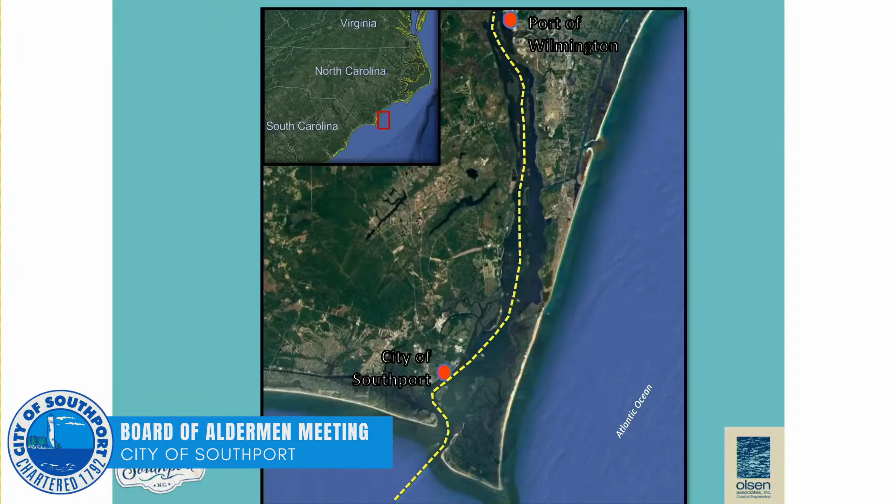So everybody knows where the city of Southport is. But there's some important things that could dictate how your shoreline behaves. This graphic is intended to show generally where Southport is, but an important feature seaward of your city is the federal navigation project and channel for the Port of Wilmington, indicated by the yellow dashed line.

This is a graphic that depicts, and if anyone can't see this, please move around the room and get closer. This is a depiction of the identified study area and project area as it was identified to us in 2018. It goes from the Marina Basin up to Bonnets Creek, about 4,000 feet in length.

I'll talk about these particular reaches a little later in the presentation. But things to be mindful of for planning shoreline restoration and improvements along the shoreline is the current state of the shoreline. It's highly eroded, going years without any meaningful attention other than revetting the shoreline.

When you harden the shoreline, there are unanticipated or undesired consequences in some of the adjacent areas, but it is the last line of defense. The revetment along the road right out here is a perfect example of the type of armoring that is fairly prevalent along most of the areas, some in the form of bulkheads. When you do that, you lose all the sand beach, the wave reflection, and just a general lowering of the beach profile and the loss of the sand.

So you turn the shoreline from what might have been a sandy, marshy shoreline at one point to a hard shoreline, and the tide doesn't even go out—you don't have any shoreline even at low tide. So it's high erosional stress, and the things that affect this shoreline are storm surge, which you guys are very familiar with, and wind waves, which are blown across the fetches we can see out the window. Larger fetches result in bigger waves.

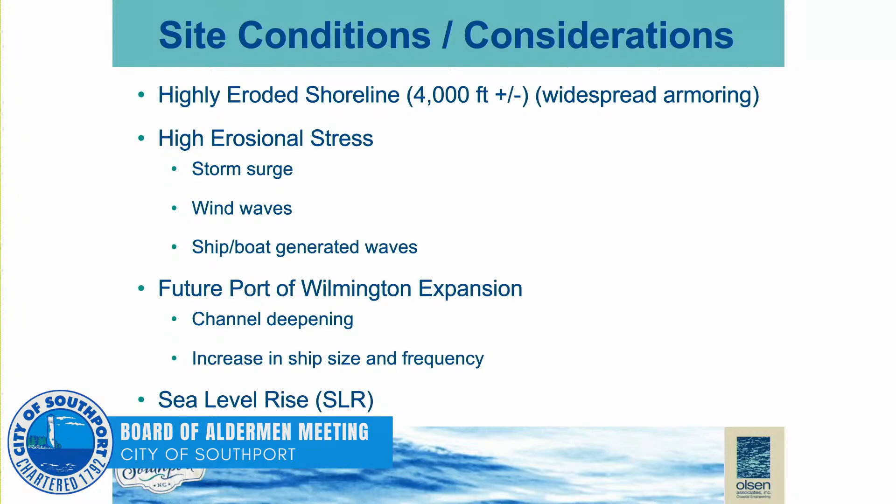So even if it stays at the historical rate, we're still going to see another foot of sea level rise here over the next 100 years. So we already have areas that are flooding, sometimes sunny day flooding here in the city.

To give an example of some of the conditions and how they might predict, or what they're predicting for Southport above a background erosion rate, various predictions. Some of these numbers are quite large, above where we think it might be in the next 30 to 50 years.

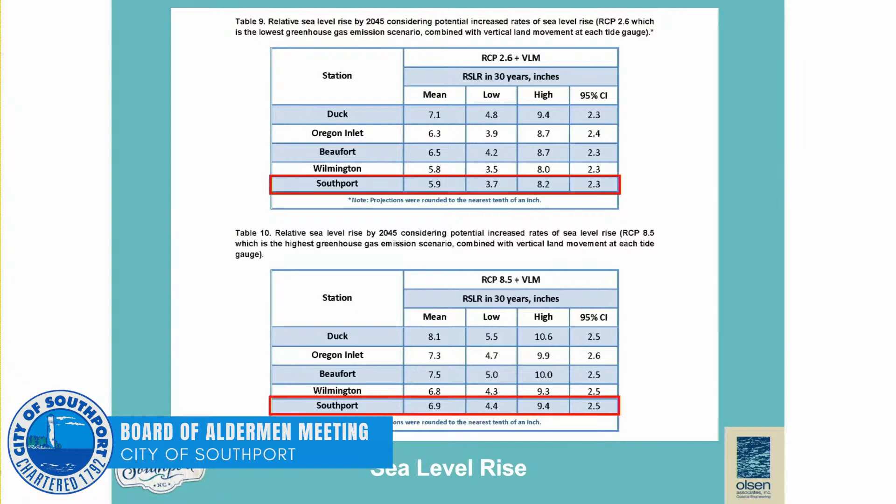To dissect the city of Southport's main shoreline, we took an approach of looking and divided it into subsections, into 6 sections from left to right. I'm going to point this out directly.

Section 1 is the area of the sand beach between the restaurants, the marina, and the rock revetment we call the U.S. Army Corps of Engineers revetment. The Army Corps built this large rock wall around the lift station several years ago as the last line of defense to protect that piece of critical infrastructure.

Then we move into Section 3, which is the area along the hotel and the restaurant with the wooden bulkhead. That's a different type of shore protection, with its own characteristics and its influence on the adjacent areas.

Then we transition into another area around the pier and the large revetment right out here. Section 4 is right outside the window here in our definitions. Then we transition into Sections 5 and 6, where the private development and private parcels are, with piers and bulkheads along most of this.

In Section 6, there's a distinction because there have been past efforts to put shore stabilizing structures there to retain a Spartina marsh in front of those bulkheads. Some of the concepts we've used are founded on the example we see here in Section 6.

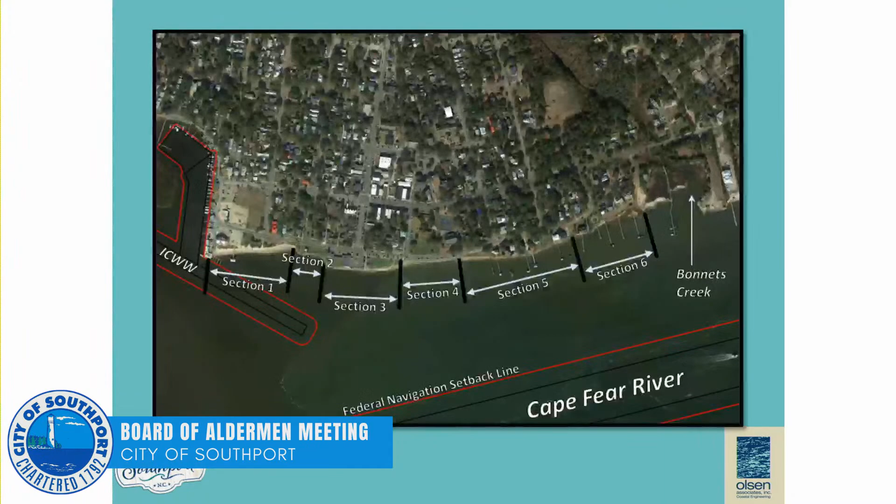So this is just drilling down a little bit. Sections 1, 2, and 3 give you a little better view. I'm probably telling people things they already know, but it's important because of what we plan for—we need to really understand what type of conditions exist along each of these areas and what the goals are.

One important thing is the sand beach, and whether public access would be a goal—for somebody to walk onto a sand beach and traverse the shore from north to south. Right now that opportunity only exists along a very short reach of the city shoreline. Would it be a goal of the city for this to extend all the way down, connecting some of the parks and public areas from north to south or east to west?

Just another example of these types of materials, but it's very important. One thing I like to show with this photograph is the size of rock used with the Corps revetment, the U.S. Army Corps of Engineers revetment—very large compared to what we see on this revetment out here.

I'd argue the reason the Corps selected this size is a design stone size to compensate for the type of wave forces expected in this area. Through the recent storms, you've seen very little change to this revetment, unlike the one along the road right here that experiences change quite frequently—because the stones out here are probably too small in size.

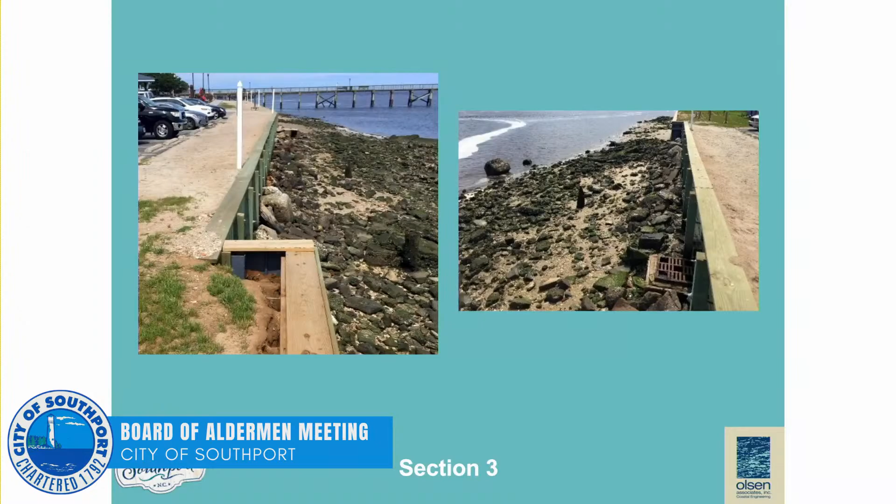But also, a cultural resource survey is currently underway, which will be needed to support regulatory decisions for whatever plan is implemented moving forward. I've been told that some of these stones that exist aren't just debris cast out there in the past as some form of whimsical shore protection measure, but also ship ballast stone and things like that from when this was in operation as a port.

Then we move into the area of sections 4 and 5. We can see here where the revetment is. Obviously, the road is a strip of critical infrastructure. At low tide, there is some limited access now, but it's pretty limited in time each day, and it's not super safe to walk along there—lots of debris and other things in that area. Then we transition into the private homes over to the right.

The existing infrastructure that is there now, and evidence of lots of other debris. A lot of the debris that exists along the shoreline are past failed attempts to stabilize the shoreline—the remains of that material.

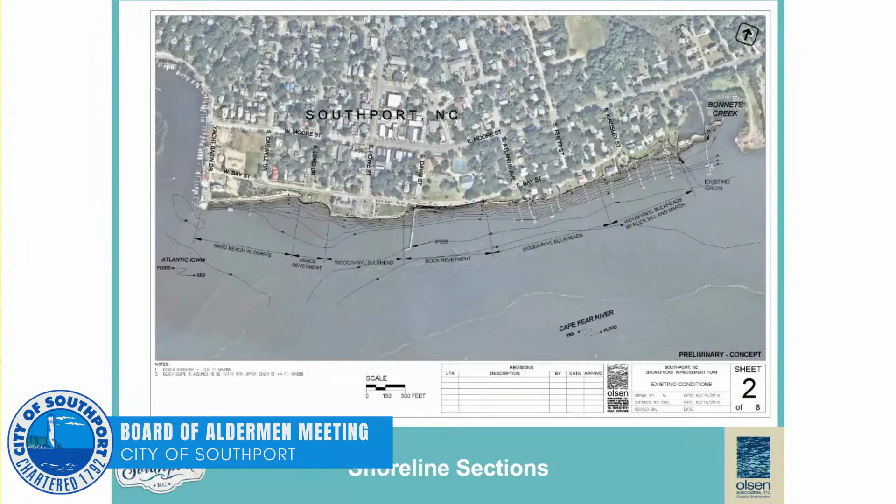The other thing we have to keep in mind is what influences the shoreline. What is the wave field like that is generated along this reach of shoreline? Wilmington Harbor's ship channel is less than 1,000 feet away, and even if you look at some of the larger boats that go by here on a daily basis, you can see that they produce waves that do influence the shoreline.

Ship waves are likely the most impactful ship-generated, boat-generated wave that reaches the shoreline. But obviously with the presence of the Wilmington Harbor Channel as well as the Intracoastal Waterway, there's a lot of boats going around this area, and so there's a lot of boat-generated waves.

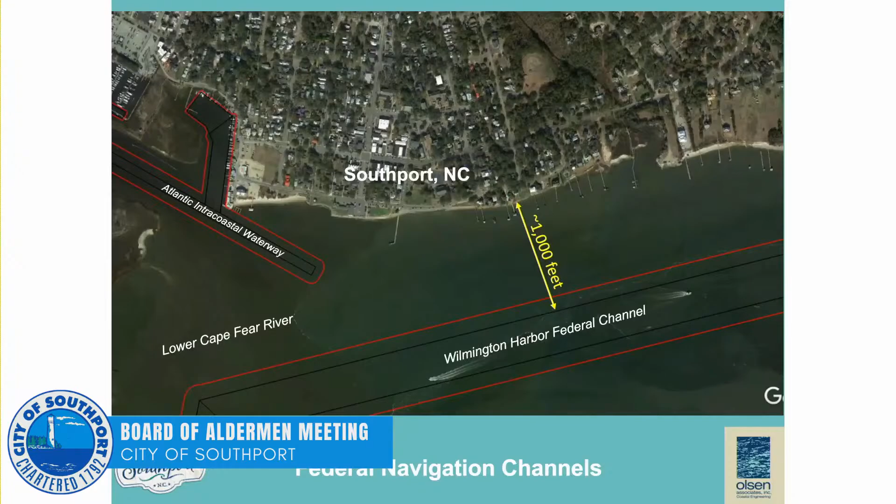So the project goals, and some of this is from last time. All this is subject to additional conversation, so we can talk about it more.

Obviously, comprehensive shore protection and stabilization is key. How do we protect ourselves from these coastal storm events and environmental factors that exist out there? But how do we do that and also provide other opportunities we might want to have? We want to protect the shoreline and upland from erosion. We don't want any more loss of land.

Ship-generated waves is a big key design feature, not only presently, but also in the future. There's already been work done by the state and the state ports to help identify some of those future forces along the shorelines of the lower Cape Fear River. And how tolerant will you be to future sea level rise, and what will be your goals, trying to compensate for those expectations? Do you live with it, or do you try to respond to it?

The environmental resources of the area, principally the marsh areas, are considered environmental resources, but they also provide shore protection benefits. Recreational value has always been a key component to the goals of the city, to our understanding. How do we integrate that into a shore protection approach? I really like the idea of expanding these living shoreline features that already exist along portions of your shorefront.

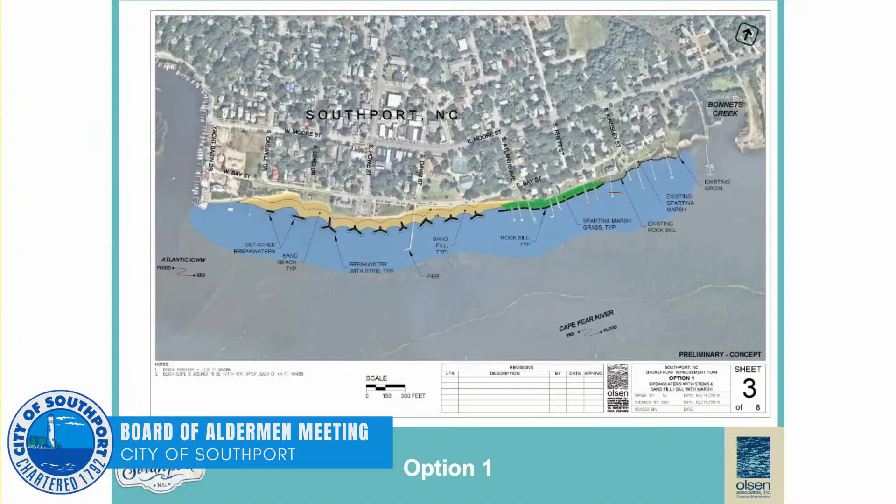And so that's where we stand now. We have these past options. We're 4 years from where we started, or where we left off last time. So there have been lots of changes—you've had several hurricanes that have been super impactful since we were here last. So we're currently updating things, and we can talk about what we're doing in a minute, but let me finish the description.

These are the types—if you drill down in here—these are what the structures and sand fill look like in cross-section. This being a revetment where there's no beach or anything. This being one of the T-groins where we've got a breakwater head and a stem with some sand fill. This is a breakwater offshore with the sand fill behind it. This is simply sand fill with nothing. This is between structures. And this is what it would look like for this part, kind of marsh, with a much smaller rock structure, a little bit of fill behind it, and grass planted on top of that. So that describes, in sections, what those structures look like.

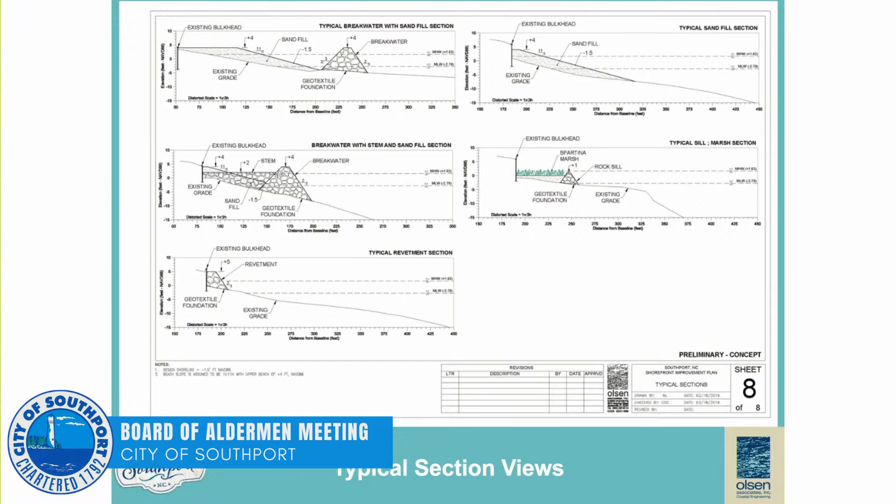So where we are—current activities—and then we'll talk about where we want to go with this. We're updating the topographic and hydrographic survey right now. That is, we're trying to get an update of what the water depths look like offshore. Has there been additional scour? Has there been additional sand loss? Which will ultimately increase the quantity of material required to build whatever option is picked.

We have the Cultural Resource Survey and Investigation. Dr. Gordon Watts from Little Washington is the principal investigator for that study. Then, once we go through this plan selection, we'll be getting into the next step. The next steps are really working toward a preferred approach and confirmation. I say preferred approach confirmation because we already have 6 options—are those options still something that the city would like to consider?

We will go through the process of updating quantities, updating projected costs with those, and help guide some decision making to ultimately reach the goal. We'll do schematic level design, then jump into the permitting. The way you get through this whole process is you do your schematic level design and jump into the regulatory portion, and you're successful.

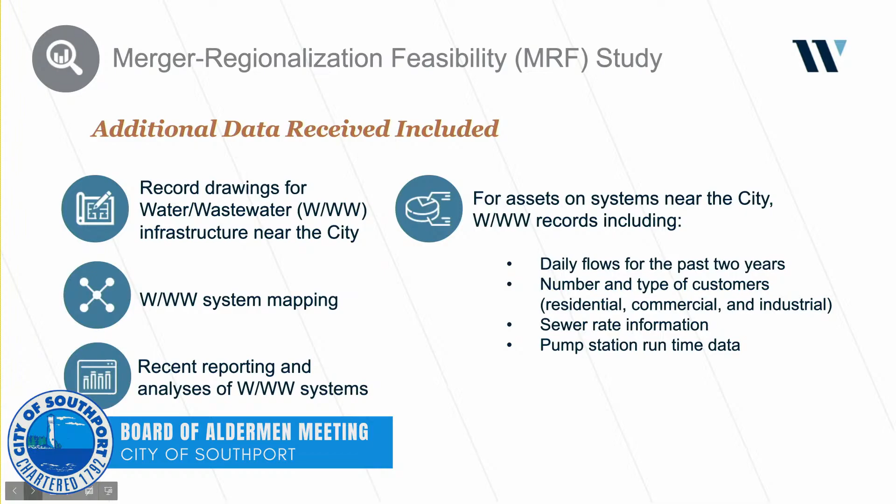Some of the information we received: record drawings for the water and wastewater infrastructure near the city, system mapping for water and sewer, recent reporting and analyses of the two systems, and regarding systems near the city, daily flows for the past 2 years, the number and types of customers, sewer rate information, and pump station runtime data. So that's the information we're working with right now and going through.

The study goals, there are 4 of them. First task is to assess the age, condition, and vulnerability of existing asset inventory. Task 2 is to develop estimated costs associated with assuming responsibility for Southport's water and sewer utilities. Third task is to conduct limited financial analyses. And the fourth task is to prepare a technical report.

With all the information we've received, we've begun compiling the overall maps, and we are fully aware of what the city is doing to improve the wastewater system design. We also need to confirm with the county what needs to be done on their end to take over the Southport utilities.

Importantly, as these studies are very involved, we typically budget 1 year to perform them, start to finish. This is based on the number of people involved with gathering of data and its review.

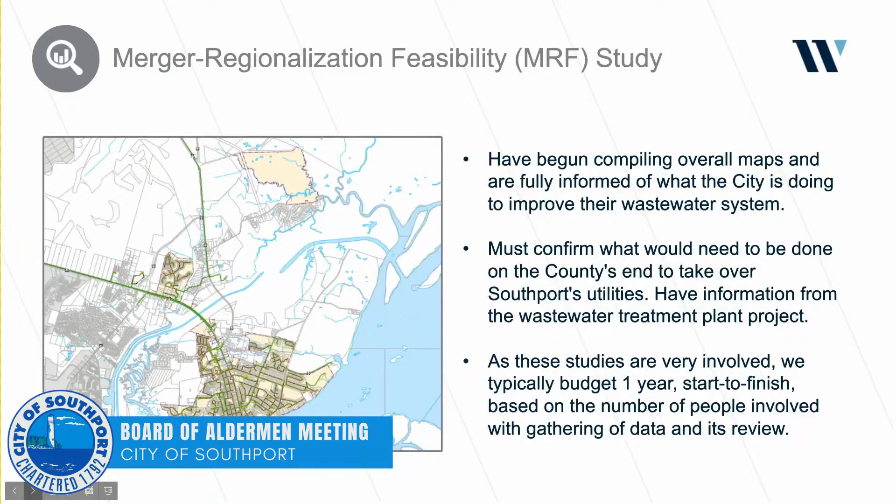Now on to the USDA project. The project involves a replacement of approximately 18,100 linear feet of gravity sewer lines. I'm sure you're fully aware of this already. It includes construction or rehabilitation of 111 sewer manholes, and the installation of a new pump station to replace the existing Leonard Street pump station.

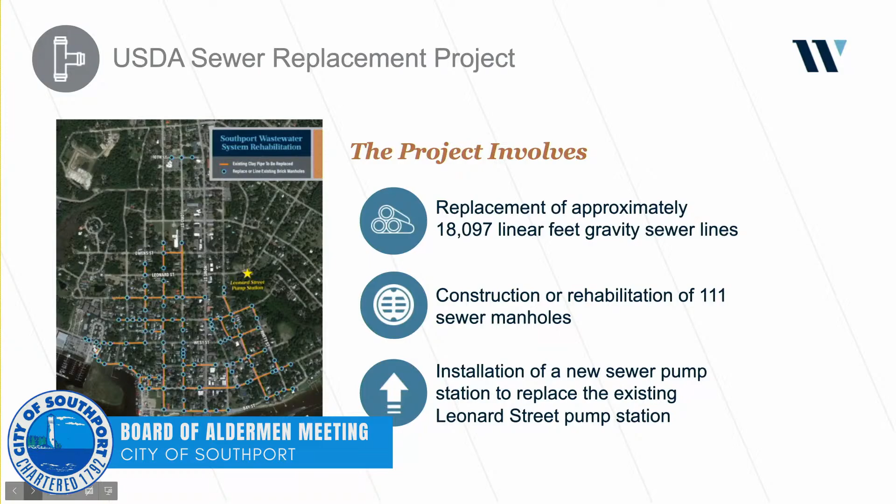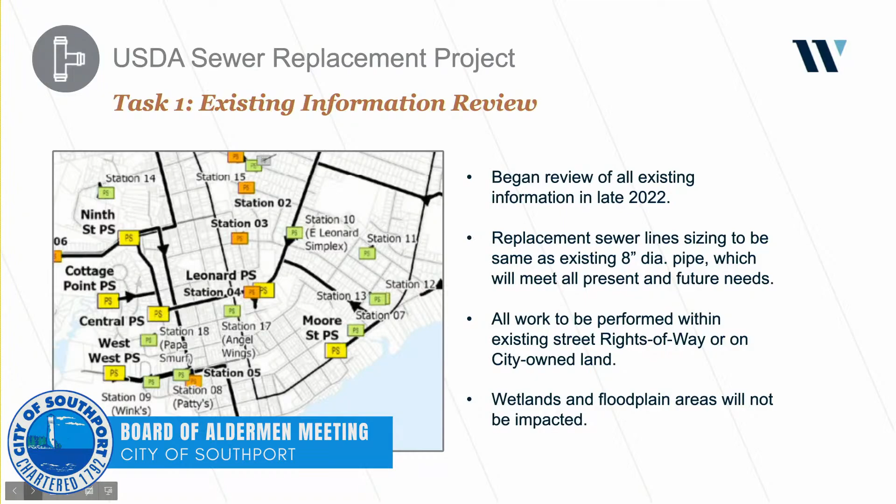The information review began in late 2022, before we even had an engineering services agreement. We just wanted to get a jump on this. From that information, we determined that the 8-inch sewer line currently in place is the correct size, so we'll be replacing it in kind with modern material. The sizing is fine for current and future needs. All the work will be performed within existing street rights-of-way and on city-owned land, and wetlands and floodplain areas will not be impacted.

Regarding the Leonard Street pump station, it currently is adequate as far as pump sizing. It's just that the pumps are old and need to be renewed, rebuilt. So the new station needs to go in. There's no new flow increase anticipated. Current operating range is approximately 49,000 gallons per day on average, with peaks estimated to 76,000 gallons per day. So again, the new pump station will be sized similarly.

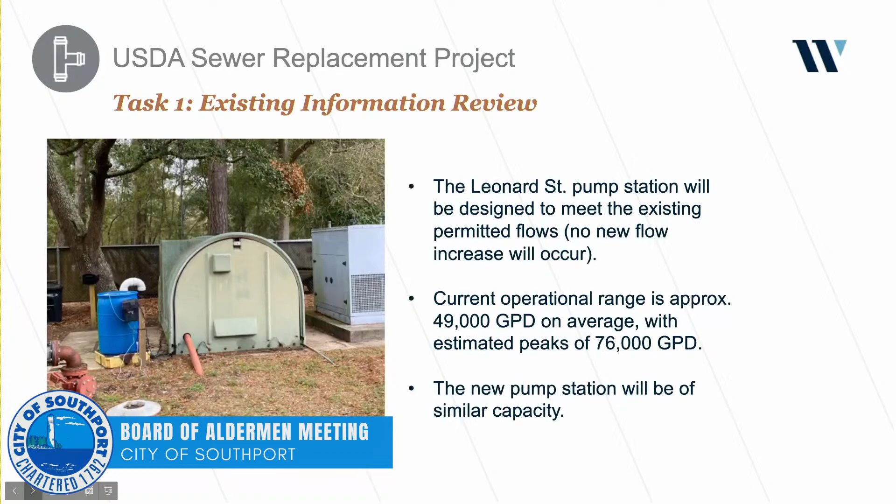Surveying here is the most important task we're currently involved with. The faster we get that information, the faster we can begin our work. I'm sure you've noticed spray paint along all the manholes along Southport. Hopefully you weren't too surprised when that started happening. We've engaged our in-house geomatics team immediately, got them ready as soon as we got the agreement, and sent our crew out back in January. This is the single most critical part of the project schedule to date. The faster we get this information, the faster we can produce our product.

Now this is looking ahead. These previous two tasks we're currently involved with and working through. The third preliminary design task happens after we receive our survey information. This is just an example here, not pertaining to Southport, but the preliminary layout will be created, identifying all existing conditions together with a plan schematic of the proposed pump station and gravity sewer alignments. The submittal will also include an updated opinion of probable construction costs, to keep the city apprised of any cost implications or fluctuations.

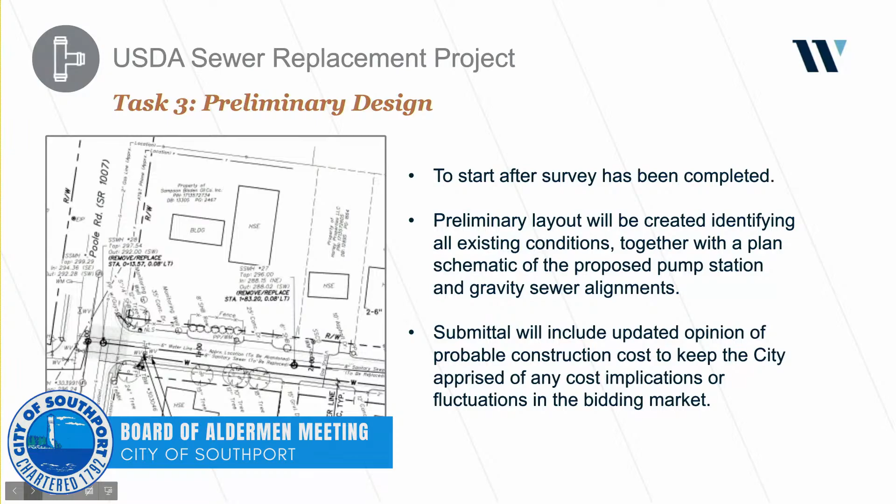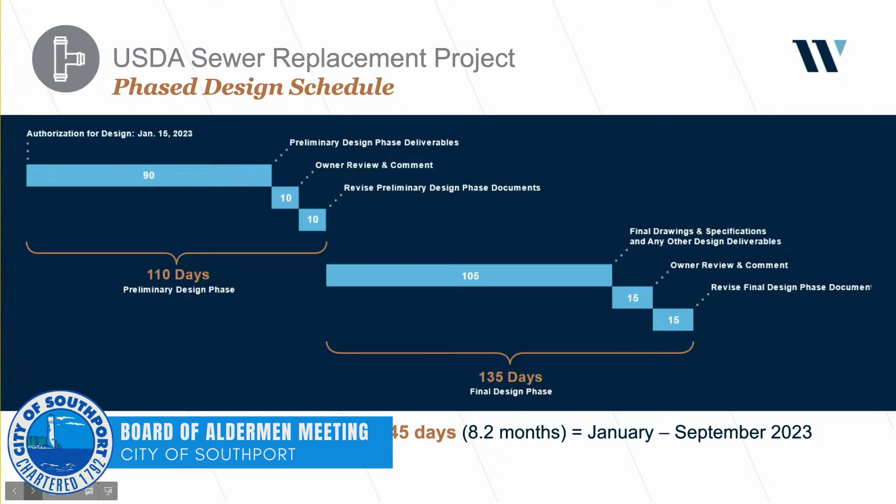This schedule was part of the USDA Engineering Services Agreement. We have 110 days starting from mid-January to complete our preliminary design phase, including a 10-day review for the city and 10 days for us to incorporate those review comments. Then we have 135 days for the final design phase - that's 105 days, plus 15 days for city review and 15 days for us to incorporate those reviews and produce the final product. So all total, 245 days, 8.2 months - mid-January to approximately the end of September. Hoping for that to be faster.

I wanted to point this out here - as far as the overall project schedule, the first part's there, up to what I just spoke about. There's 140 days allotted after the permit applications go in. Based on the 140 days allotted to the schedule, we would be ending the end of 2025, November 2025. So the shorter that permit process is, the more time we'll have available, or the more quickly we can end the project and get it done with construction complete. I'm just saying that based on the schedule currently laid out, it allows for 140 days for permit review and approval. If that's shorter, the project timeline could shrink a bit.

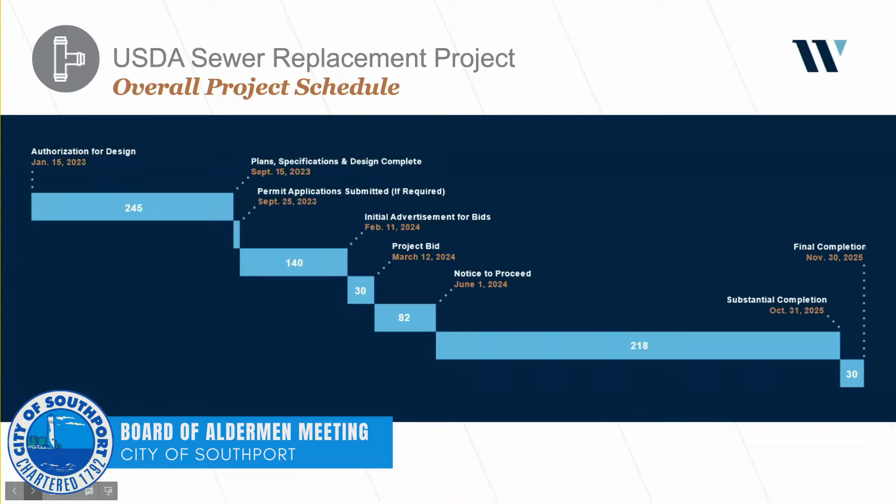So according to that, when does the first shovel go in the ground? That first shovel is June 1st, 2024. Again, hopefully we can move that up a bit. It's also to work around the summer season here as well - obviously with tourist season and all, we'll try to coordinate that to make sure there's not too much impact.

So with that said, that is the end of it. Again, an overview this time. Next time we'll have more real information to give you, as we will have gone through a little bit more of the process at that time.

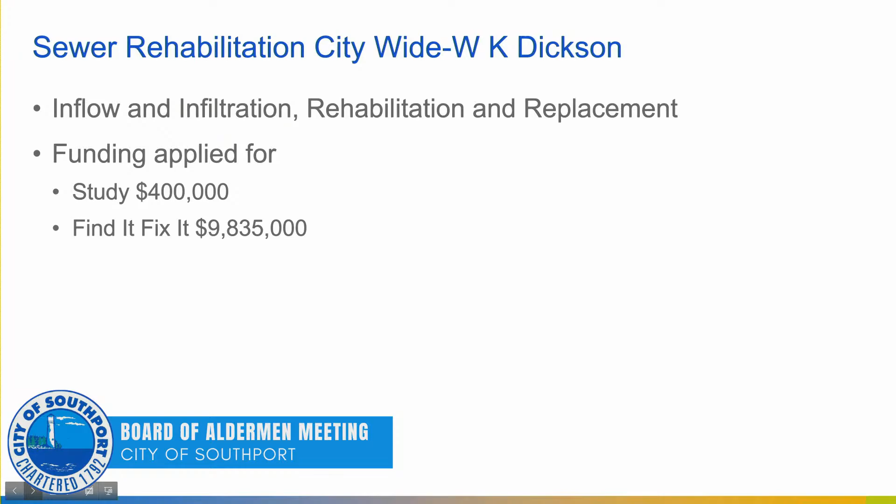We also have smoke testing to be performed. Just because it's PVC pipe doesn't mean it's completely tight. The city has also encountered some manholes that have had leaks in them in the past and has had this fixed. But with this study, we'll be able to take a broader look, try to identify the areas where water is getting into the system and causing impacts during severe weather events. That'll help with managing the current system, having future capacity, and future cost.

So that study—the phase of it has been recommended by the staff at DWI for approval. The next step would be a letter of intent to fund, and then there's a process of back and forth fine-tuning the budget and schedule before starting those activities. But that can be done concurrently with these other projects, and since it's a grant, it'll help you identify and get the best value for prioritizing projects and the best value for construction cost.

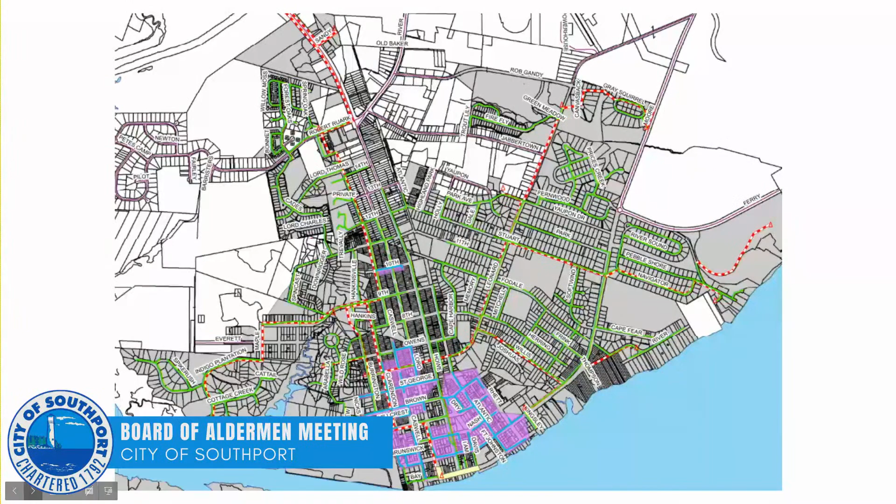The other project is the lift station rehabilitation, with a funding amount of $2.8 million. We've started that project—done field assessment and drawdown testing of the pump stations; I'll go through the results in a minute. The next thing we've started is evaluating different scenarios. We want to utilize the infrastructure you have in place, look toward the future with good improvement ideas, and use this money where you're going to get the most use out of it. I'll get into that in a second. Our schedule is to complete the design this year and start construction next year.

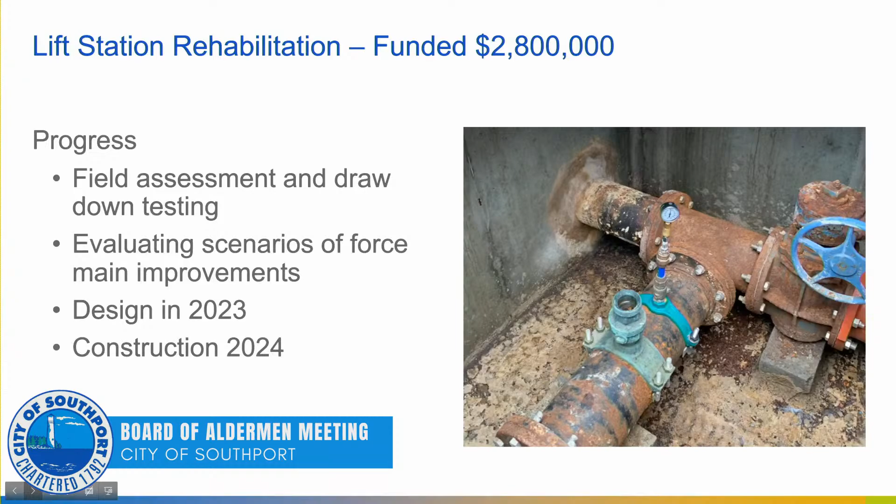The field testing—staff helped us out considerably and is still involved—was done at Park, Leonard, Moore, 9th, Central, and Forest Oaks lift stations. The results were that the pumps performed about as expected. Many of the suction lift pump stations have been replaced, the mechanical equipment has been replaced, and there's been some fine-tuning and adjustments we've been doing and recommending with staff and manufacturers' representatives to get the most out of your system. Those are just common things you need to do.

Moore Street was one that we were surprised had less capacity than we were expecting, but we're also looking at 9th, and really Central is the most important one because it collects all the wastewater from town and sends it out.

As we've been involved in this process, there's been some infill development requests on 9th Street. There's a development on Price's Creek that is looking for flow, and then there's a development on East Moore and Ferry Road that's looking for capacity.

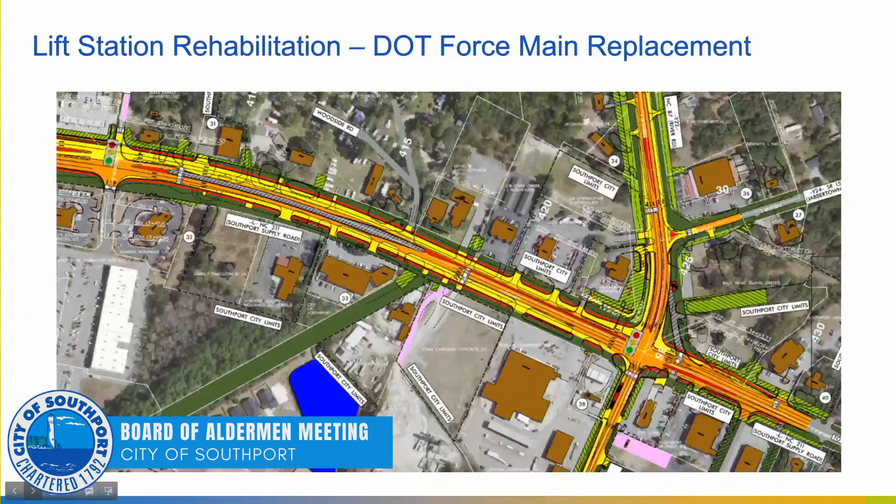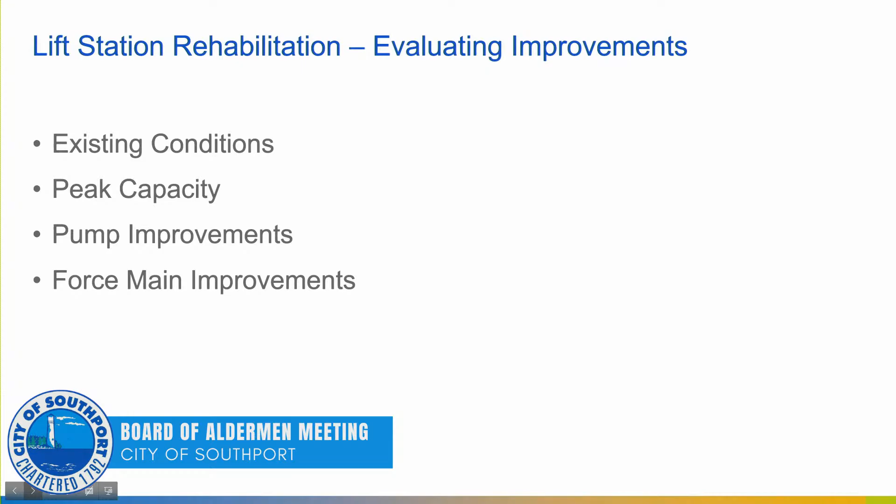So you have a lot of flow coming from all over the city that has to be repumped from Central up to Sandy Lane. If you're looking at the system and it doesn't really make sense, it's because some pipes were heading in one direction and have to be rerouted - we were collecting the wastewater and getting it out. The plans at the time were to handle that current flow along with future flows from development, directed directly out of town to Sandy Lane, and you've had development requests in those areas.

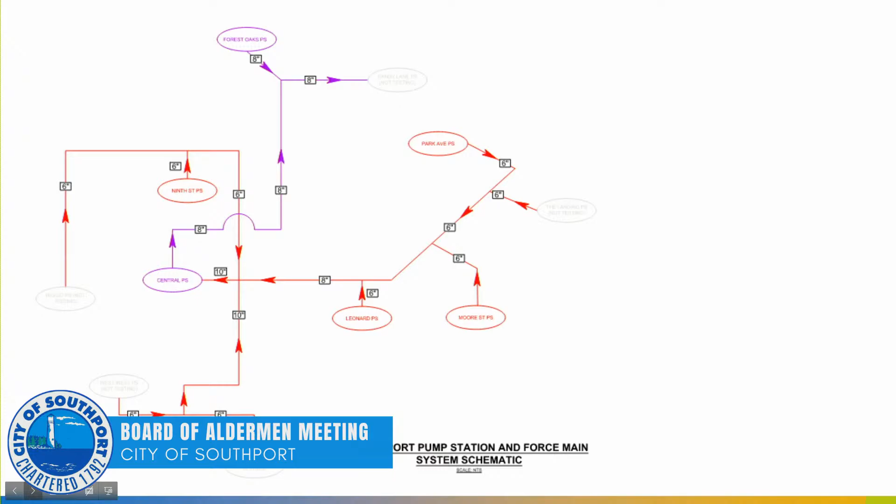Any questions, Alderman Alt?

I do. Has the city shared with you the E. coli and other pollution data from the Three Creeks? I have been provided some of that information. We haven't had an opportunity to go through all of it, but yes, we have been provided that.

So as you're going through the matrix of trying to figure out how to prioritize this, to give you an example, on the 9th Street sample, one of the last samples, if 230 is the cutoff between good water and bad water, it was 2,420. So there's a problem there. I don't know what the problem is, I don't know if it's our pipes. We also have samples taken at Price's Creek and Bonnet's Creek. Those spike - one time they're virtually nothing, and the next time they're off the charts. So I don't know what causes that.

I have to line that up with the weather conditions at the time to see if that's an issue. But I really would like us to concentrate - if we've got a public health issue, whatever is causing this, I don't know what it is. I had a thought at one time, but Mr. Stanley has told me, correctly so, that it couldn't possibly be affecting the system for a full year.